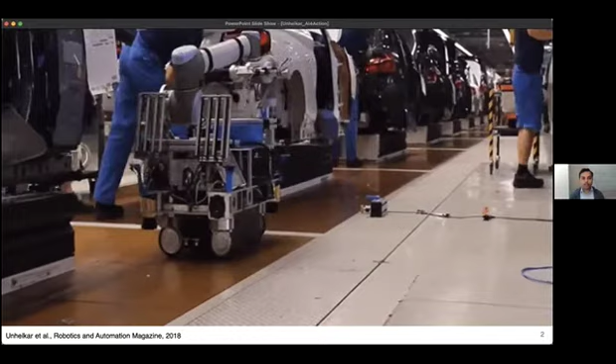Let's look at an example of one such robot. This is a robot that is working in an automotive factory, helping humans who primarily do the assembly of many cars. It's helping them build cars.

And there are a lot of exciting things happening in this video. First of all, there are fancy cars being built. If you go to a factory, you will see that a car is being built every 2 to 3 minutes. This is from a BMW factory, a new car is being shipped out, and there are a lot of humans who are helping assemble this car. It's a very challenging, time-intensive process, and it has to be done precisely in a very short amount of time.

Now, in order to do this task better, and to help humans do it faster, there are a lot of applications of robots that can go and assist humans in making these challenging tasks possible. This is one of such robots that makes this challenging task possible, called Rob at Work.

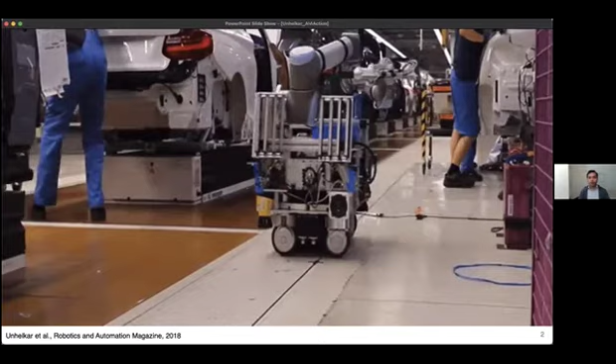What I find really exciting about this robot is, compared to traditional robots, which we'll see soon, this robot can autonomously decide how to help humans, how to work alongside humans using the sensors and software that it has on board.

And that's sort of the challenge we're trying to solve. When I look at these bulky, big robots that can do impressive things, I kind of think about computers that were present in the 60s and 70s. I was not around when these computers were present, but if you talk to someone who has seen them, or see documentaries from the 60s and 70s about the early stages of computers, you would have computers which were so big they would occupy a whole room or maybe even multiple rooms at times.

And these bulky robots, this big industrial robots we saw, even though impressive, are analogous to those early computers. Whereas if you look at computers today, or computers in the 80s, they were small, people could use them and we could program them to do different types of tasks. So robots are also at a very interesting inflection point, where they're moving from industrial settings to settings which are currently industrial, but will soon be in our homes, in our offices.

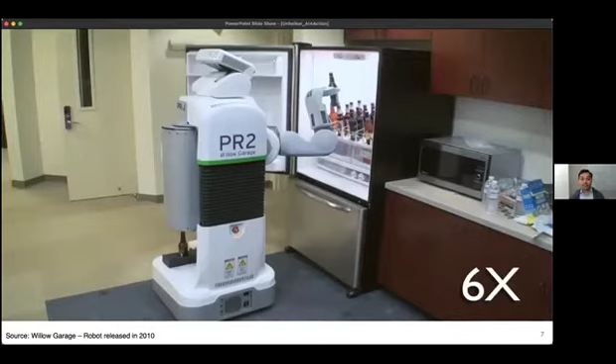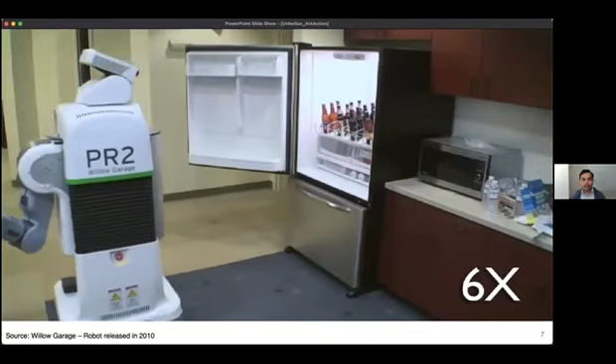So let's look at a very exciting example of such a robot. This is a robot called PR2, made by a company called Willow Garage. This robot is doing a very interesting, very challenging task from a robotic standpoint, while working in a space shared with humans: picking items from a refrigerator, then closing the refrigerator and delivering these objects.

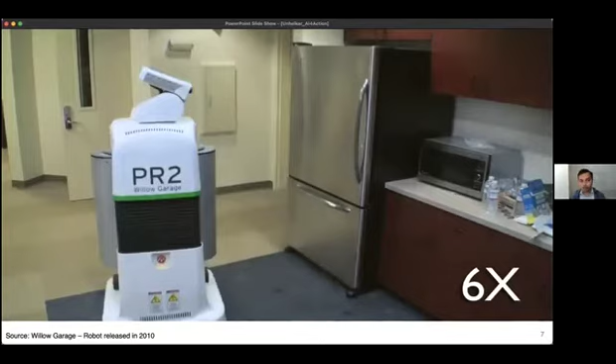All of these tasks are being done by this robot autonomously. It's very impressive that robots are at a stage where they can do all of these tasks by themselves. This sort of example that we saw in the kitchen reflects trends we can see all across the industry.

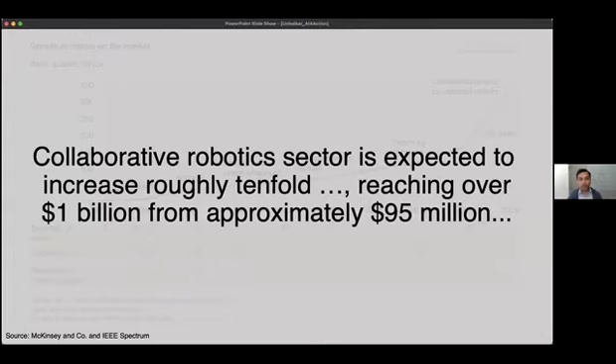Collaborative robots are one of the primary novelties in the robots being sold today, and they're contributing to the exciting growth robots are seeing in the market. The collaborative robotics sector, robots that can work with and alongside humans, is expected to increase roughly tenfold, reaching from around $100 million to $1 billion market within a very short period of a few years.

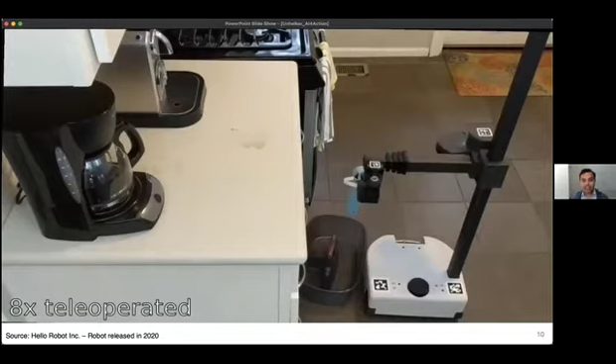So the robot we saw delivering beverages was from about 10 years ago. It's still a very impressive robot, but slightly dated. This is a very recent robot called Stretch, released last year, which does even more impressive tasks. Let's look at what it can do.

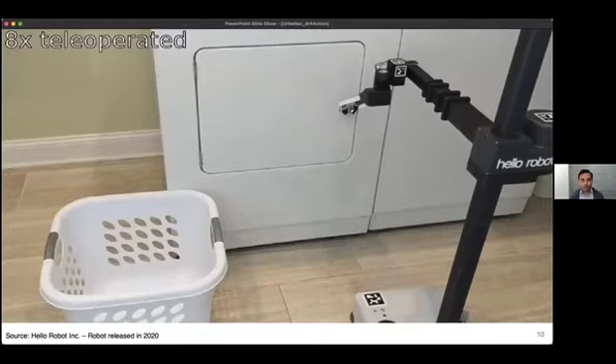So it can do a very impressive set of tasks. And even though it's doing these tasks by teleoperation, meaning a human is behind controlling the robot, it's amazing what robots are capable of doing, even with human intervention, today.

Similar to the history of computers, when we look at the history of robots, we had industrial robots initially, which have been present for the last 20 or 30 years. Now we have robots such as the PR2, which we saw on the first slide, and the Stretch robot, which are really transforming what robots can do and what is possible with robots.

And what's amazing with this progress is they're also becoming very affordable. The PR2 robot, released around 10 years ago, cost close to $500,000, whereas robots from today you can purchase at a fraction of what it used to cost 10 years ago.

This is a really exciting phase, and it gives me hope that I will have robots in my home in the next 10 or so years, able to do some of the interesting tasks we saw in the videos before.

In my education and career, I've been really fortunate to work with some of these robots hands-on, initially in India, then in Boston, and finally at Rice, where I've been able to get a sense of how these robots are programmed and how they reason about the world.

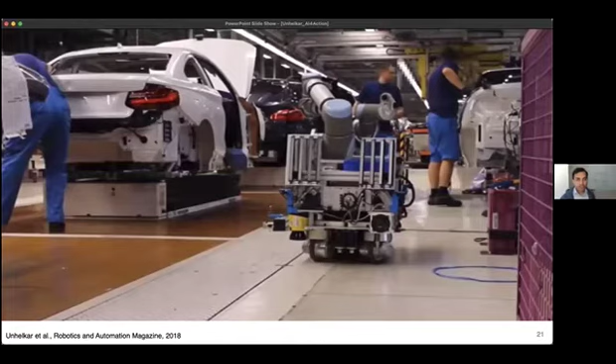In this robot, as we've seen in the example, there are sensors here, if you can see my mouse pointer. This is a laser scanner, which allows the robot to see if there is a human or any obstacle around it. It has cameras, which also help it do that. And then it has this arm and these wheels, so it can move around and make changes to its environment.

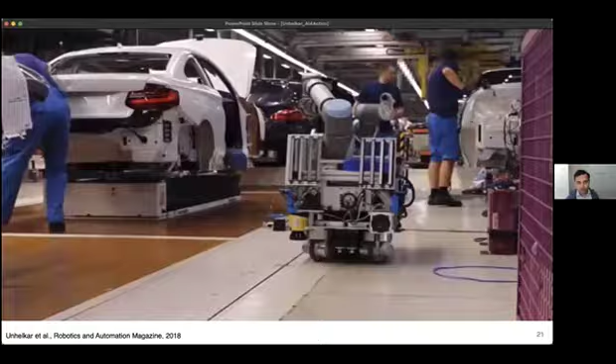All right, now that we've seen what an abstract robot looks like, let's look at how we actually go about programming this robot. Both the robots we saw, all three GIFs we've seen so far, the robot working in the factory, the robot delivering things from the fridge, and the robot being teleoperated, all of them use this exciting piece of software called robot operating system.

This is, I would say, one of the very exciting developments in robotics in the last 10 years, which has made robotics more open source, more easy to program, and easy to prototype. Robot operating system, similar to other open source libraries, is a meta operating system for robots. It's sort of an app store for robots, where you can upload programs or download programs from other researchers and users to be useful for your robots. It has these very exciting features that allow software reuse.

It's very important to stress the utility of this feature. 10 years ago, if you were designing a robot from scratch, you'd have to develop a lot of capabilities yourself, deciding which sensors and actuators to use, and implementing the different algorithms the robot needs. What ROS makes possible is that you can use algorithms that other researchers and users have made in your own robot, which helps you rapidly prototype your system and focus on the elements you want to focus on.

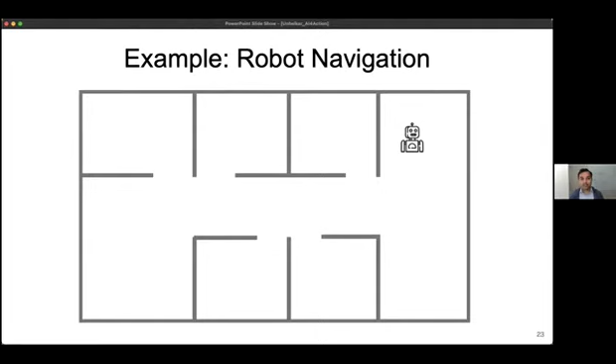First, it needs to know where it is in the map so that it can decide where it goes next. Then once it decides where it is, it needs algorithms to decide what is the best action to take at a particular time. If it's at the bottom, maybe it has to go up, and so on. And if it sees an obstacle, it should be able to navigate around it so it doesn't cause a collision. So it needs really challenging algorithms to make this simple task happen.

ROS allows us to do that by breaking down this problem into multiple pieces. First, let's say to implement this task, we want to use certain sensors, such as cameras. ROS will require us to write a node, or write a program, which takes data from cameras and reads that data on our computer. So it will first be asked to write this node.

Then, if we have additional sensors such as encoders, which tell the robot how much its motor has moved or how much its wheels have moved, we'll write that program as well. Once we have this data from these sensors, which are images and wheel velocity, we can combine this data in a localization algorithm to identify where the robot is at a particular point in time.

Then we can use this robot position with planning algorithms to figure out the robot's path. Finally, we can give this path to a controller algorithm to decide how the robot's wheels should move. And then this will be pushed to the robot so that the robot can actually move in the map.

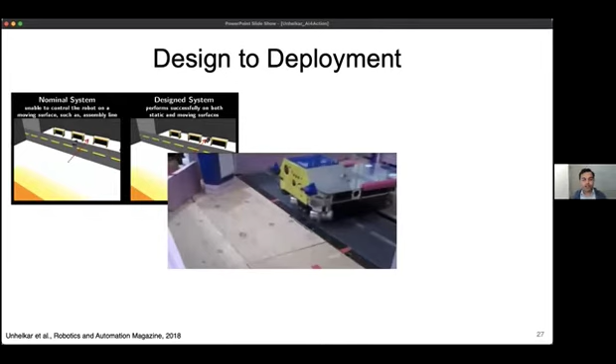Finally, when we were confident the robot worked both in simulation and in the controlled lab setting, only then were we confident enough to move the robot to a real working environment in a factory. Again, in all of these systems, from simulation to the lab to the factory, we were using ROS so we could reproduce and reuse the software from one setting in another. That's the design to deployment life cycle for a robot.

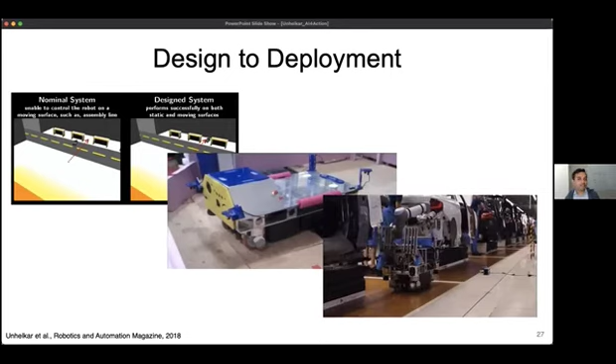So at this point, I'll stop for any questions and see if there are any comments you guys might have.

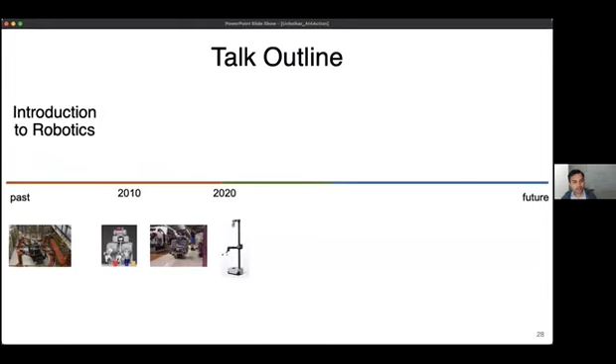I have one question: what exactly is localization again? So localization, thanks for that question. I can't see who asked, but localization is basically a module robots use to localize themselves, to identify where they are in a particular environment. For instance, a localization technique would allow the robot to determine its position given the information from the sensors.

These robots have a sensor called an encoder, which measures how much their motors have moved. For the navigation example, you might have encoders on the robot's wheels, which tell you how much the wheel has moved or what the wheel's velocity is. When implementing this on a physical system, you need software to read the data from the motors and convert it into a variable your localization algorithm or some other algorithm can use. This transformation from sensor data to a usable variable is what's done by these drivers.

Yeah. Okay, I see. Thank you.

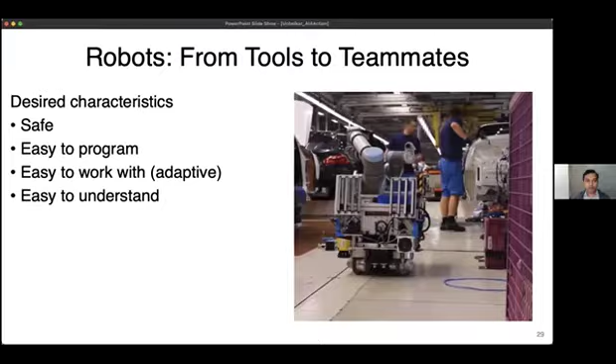And finally, if you're working with a robot and we cannot understand what it is doing, that may not be ideal either. So we want our robot to also be easy to understand. When we design robots that can actually be teammates for us, we need to bake in all of these characteristics. We will see how we can use AI at a very high level to bake in some of these characteristics.

So again, let's take a step back and look at why we need a new set of techniques, a new set of algorithms when thinking about robots that can work with humans. To demonstrate this point, I'll show a blooper video from a very famous robot trying to deliver an object to this human. This robot is very impressive - you might have seen videos of it on YouTube doing backflips and a lot of exciting things. Here it's doing a very simple task from a human standpoint - just handing over an object.

But let's look at what happens when the robot actually tries to do that.

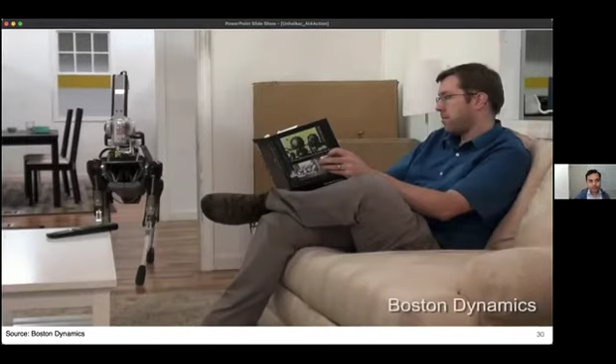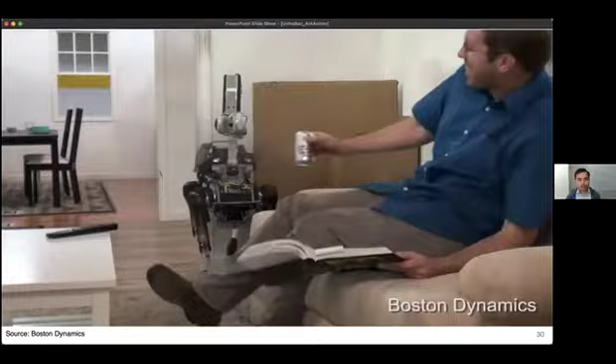So here, as you saw, the robot was able to deliver the object, but it was not very ideal. During the handover, the robot wasn't able to recognize whether the human had picked it up, and eventually it just failed. This was a comical way to demonstrate that it's not as easy to convert robots that work well by themselves into human teammates, because they have to reason about a lot of new challenges when working around humans, particularly about what humans want and how humans are acting in order to complete the task.

When designing robots that can work with humans, we have to fundamentally adapt our perspective from what we had before, where the robot had a high level perspective of having some observations and actions. Now we need to explicitly think about the human that the robot is working with. The robot needs particular AI tools and models to think about the human - what the human might want in a particular situation, what the human is doing, in order to be a good teammate.

And that's essentially what the research that my group does and other human robot collaboration researchers do focuses on, when we are designing robots that can work with humans.

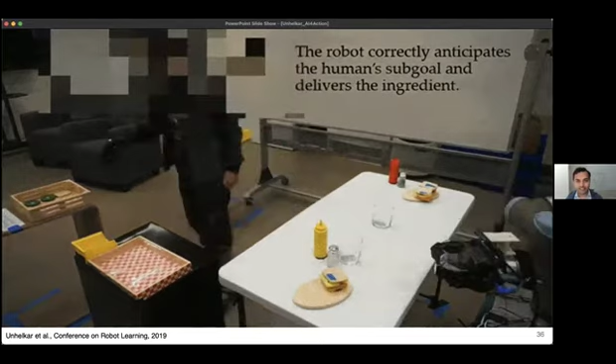The robot had to identify which sandwich the human would make next, where they would make it, and when they would make it, to provide the appropriate ingredient. The robot has to do a lot of challenging algorithmic problems to complete this task.

First, it has to identify where the human is, so it needs certain sensing algorithms. Then it needs to find out where the human would go next, so it needs machine learning to predict what the human will do next. Finally, it needs to use planning or optimization algorithms to go to that location so it can give the human the correct ingredient.

And all of this has to be done very quickly, because if the robot is even a fraction of a second late, the human might move on to the next sandwich or task, and the robot's effort will not be useful anymore.

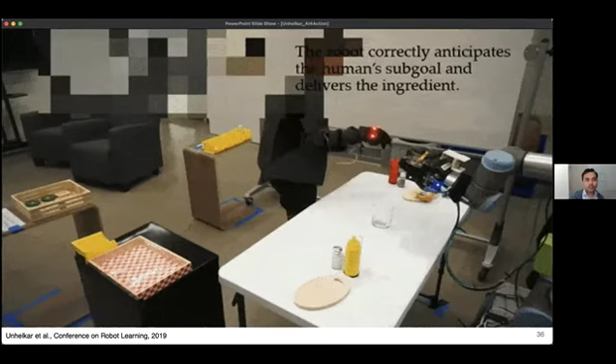So all of this is being done by a combination of the algorithms we saw before. It's using sensing to identify the humans - the human is wearing a particular glove to make the sensing easier in this scenario. The robot has an onboard computer solving the optimization problem to identify where the human is going next and what the robot should do next. Finally, using its hardware, its gripper and motors, the robot delivers those parts.

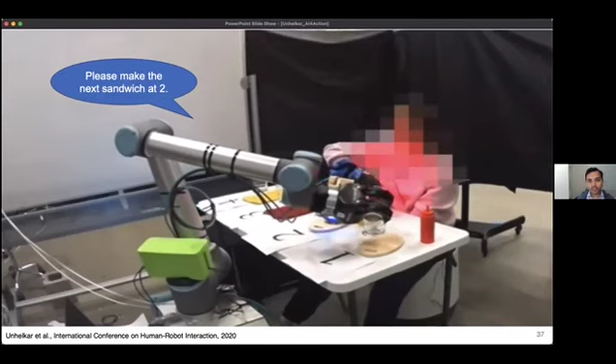When working with humans, we can also use communication as a very important tool to do tasks well with robots. This again uses some of the AI techniques we saw at a high level. The robot communicates with the human while they are doing similar tasks. At times it tells the human what they should do next so it can support them well, and at times it tells the human what the robot is going to do next so the human can adapt while doing the task.

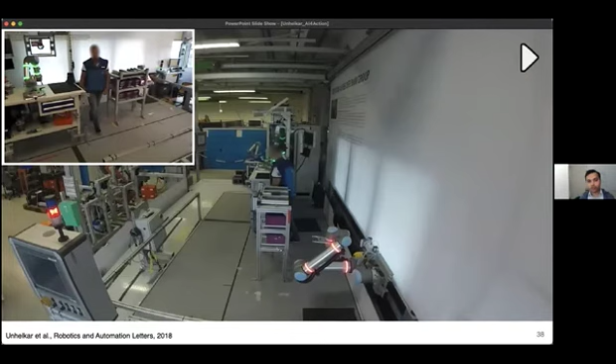And finally, we have used some of the algorithms that we talked about to do tasks in the factory. Here the robot is not helping humans make sandwiches, but helping them with assembling different parts in a factory by delivering appropriate parts or giving them way when they are sharing space with each other. The robot uses its algorithms to identify where the human is, predict what the human is going to do next, and then modify its own behavior so that it can adapt to what the human is doing.

By using the algorithms we have developed, the robot can be not only safe, but can also improve the task performance of the human-robot team. So that was very exciting, that this robot was both safe and was able to help the team do the task faster.

Before we go to the final part of the talk, where we're talking about some of the particular research problems or research questions that are open that we are currently thinking about, I'll stop here to take some questions if you have any.

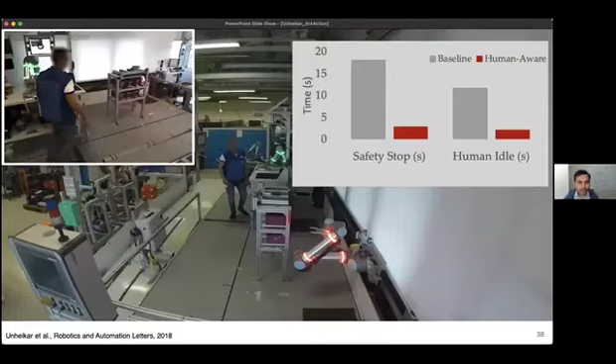Okay, let me go back to the slide. When we do this interim approach, where there is some amount of model specification and some amount of planning, if we go deeper into it, which we did today, the models that the robot is using could be learned with data, and if they need to be learned with data, they need labels to learn from, and this labeling requires some human to provide those labels. If you are extending your robot to do very complicated tasks, to learn these models you might require a large amount of labels, and that's where manual effort is involved.

And why would it be limited to small problems? Because of how many things it would have to, how many labels it would need?

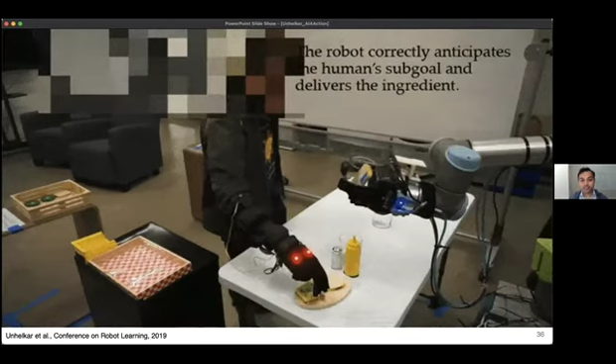Exactly. It is limited to small problems for a couple of reasons currently, and this is something being worked on. First, because of the data needs or the label needs. For very large problems the models might be very complex and you might need prohibitively large amounts of labels. But the other thing that is very challenging for these robots is that when they're planning, essentially what they are doing is deciding between different alternatives and what is the best alternative to take at a given point in time. So in a larger problem you might have many alternatives to think about before making a particular decision. If we go to this video, here the robot has many choices: it can choose which ingredient to deliver, where to deliver that ingredient, and when to deliver that ingredient. All of these choices clubbed together mean the space of decisions that the robot has is very large, even in this simple setting.

To optimize over all of these different choices is very challenging for today's algorithms to do. One way to address this challenging problem is to use reinforcement learning, but then it has its own challenges. So the planning-based approaches, which rely on solving an optimization problem, are limited to, relatively speaking, smaller problems than reinforcement learning.

Okay, I see. Thank you. I have another one. Yeah.

So earlier you mentioned that one of the concerns with robotics is we want to be able to understand what the robot is doing. But as AI gets more advanced, and we already have things like neural nets where it's very difficult to understand what they do, how are we going to be able to comprehend even more advanced AI?

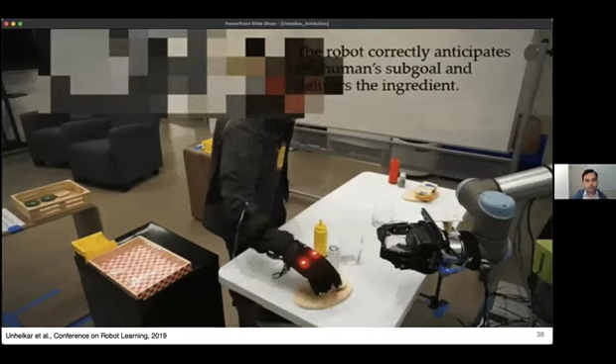That's a great question, and I have a couple of comments on this. First of all, as AI becomes more complex, it is definitely more challenging to explain what it does. I completely agree with you on that.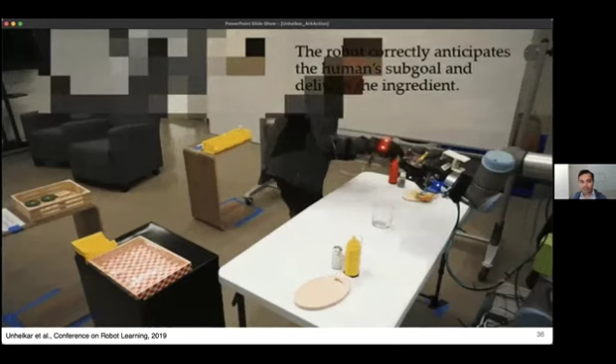But I think it's even more important as AI becomes more complex to explain what it does. Because if you have a complex system and you really don't understand what it's going to do, it feels very irresponsible to deploy it among people without knowing what the system is going to do. It may be unsafe, it might lead to bias, it might lead to all sorts of societal issues from a human standpoint.

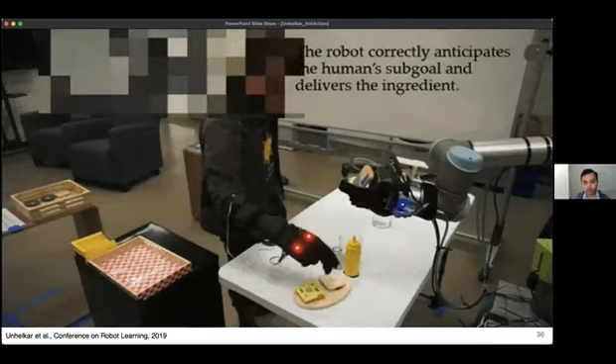So as AI becomes more complex, even though the explanation problem is difficult, it's important to solve. How people are solving it, including students in my group, is we are thinking about using different ideas from how humans learn about other complex systems to explain AI-based systems.

Humans have this amazing capability of generalizing, of making hypotheses by observing something. So here, even if I didn't tell you anything about this robot, and even if I didn't have that caption on top, you would be able to guess briefly what the robot is doing. It may not be completely correct, but you might have multiple guesses of what the robot might do.

By using this capability of humans to guess and make models of what they observe, we can provide them certain examples to explain what they're going to do. So that's one high-level idea people are exploring right now to explain robot behavior. But that's just one among many techniques being explored.

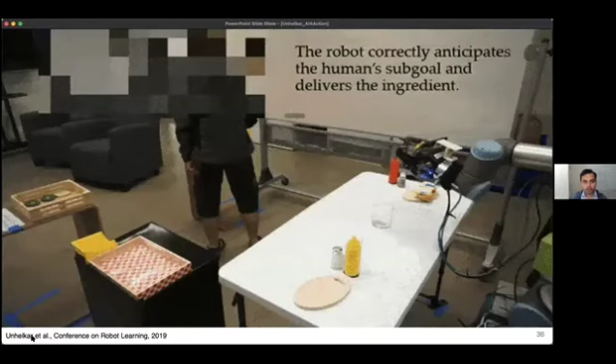Okay, I see. So with generalizing, you get a general sense of what the robot is doing, but if you wanted to know what the robot was doing in specific steps, like at each node of a neural net, how would you understand something like that?

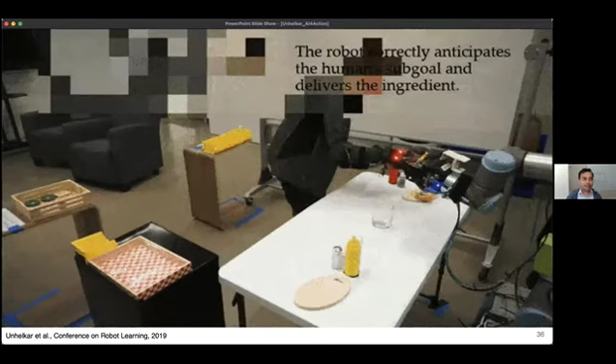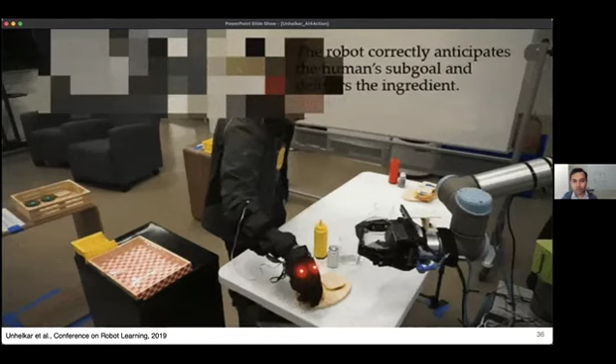Yeah, let's take an example. So you see this robot do something at the start and something at the end. I only show you the start of the GIF and the end of the GIF. Maybe you can interpolate in between to guess what the robot did. Your guess may not be correct, but you can make that guess. And if I show you a few more examples in between, you can improve your interpolation, you can improve your guess.

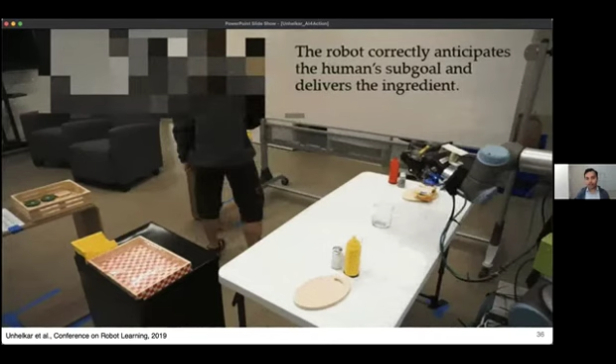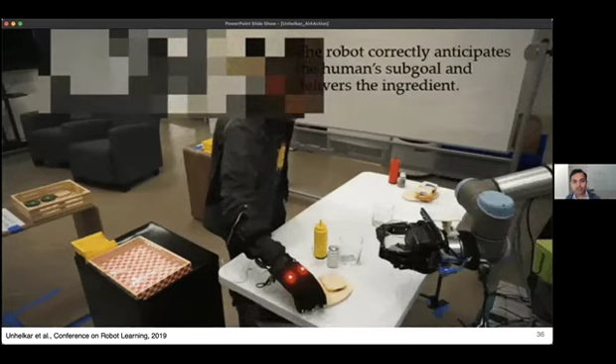So if you're explaining a very complex system to a human, maybe one idea, just one solution approach, is to give them sufficiently informative examples so they can make a good generalization of the system. That's one idea that is used. Okay, I see. Thank you.

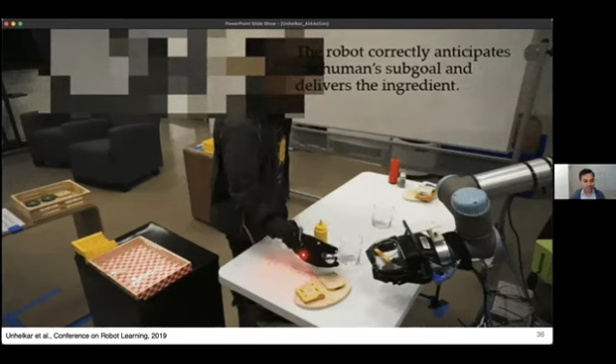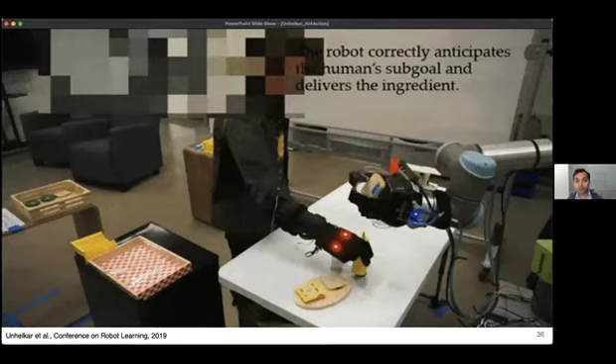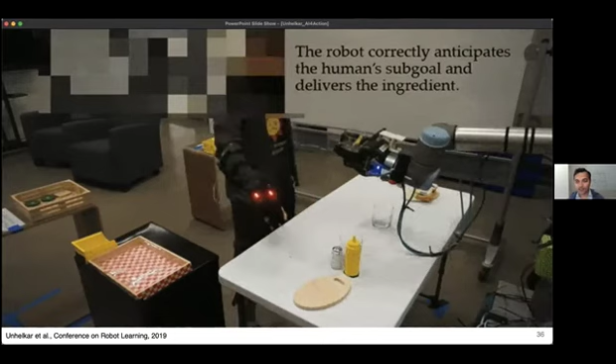But this is again one of those problems which is very challenging to solve, because AI systems, especially robots working with humans, are finally becoming complex enough that explanation is becoming very critical. These problems are also being tackled only in the last few years. So if you ask me this question in a couple of years, maybe there'll be a lot more exciting techniques that I can share with you.

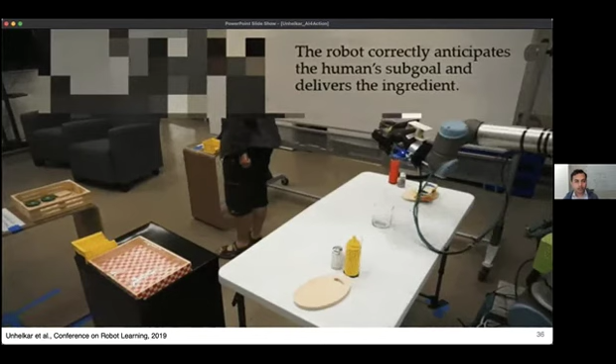Okay. Any other question before we proceed?

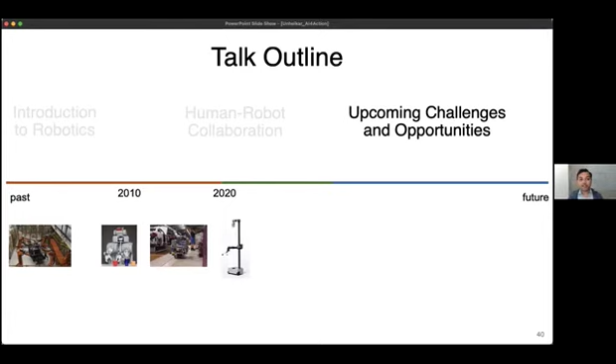Finally, I'll talk about some of the upcoming challenges and opportunities we are thinking about when designing these robots. As we work on these robots, I particularly focus on the AI aspects of designing them. And I assume a lot of you are also interested in the AI aspects of designing robots.

But particularly when designing these complex systems that have to work with humans and do physical actions, there are a lot of subfields that we borrow from. In today's talk, we only looked at AI and a little bit of sensing and actuation hardware at a high level. But if you talk to a researcher working in this area, they would often borrow from a variety of techniques. I list some of them here. So there's definitely AI that we talked about.

Then we need to think about different materials and mechanisms, which might be very important to make the robot either safe physically, or more fast, more repeatable, and more accurate. So there's a lot of work in designing different physical mechanisms and materials for robots.

Then there is a need for embedded systems, computers that can help robots process more data, more computation within a short span of time. This is very challenging for robots, because they have to make these decisions very quickly. As we saw in the videos with humans, the robots had to reason within a fraction of a second what they should do next, so they can adapt to humans and efficiently support them. This is something that will be made possible by more advancements in embedded systems, computers that robots can use to make this computation possible.

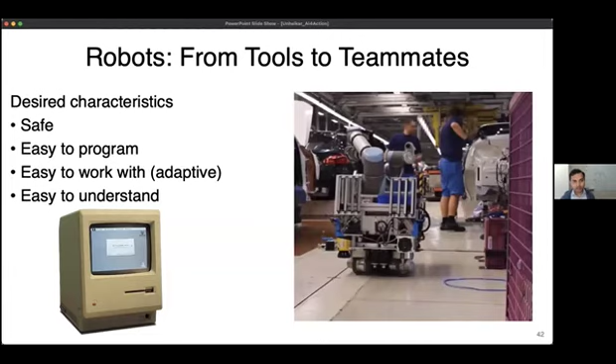In the robotic systems I was showing you before, the robots were not as big as industrial caged robots, but they are still physically very capable. One way to make them safer is to make them compliant. This is a very exciting robot that came out around three or four years ago, which is compliant. What we mean by compliant is if it detects an external force, it will comply to it. So if it collides with a human, it will not hurt the human, but will adapt to the human's impact.

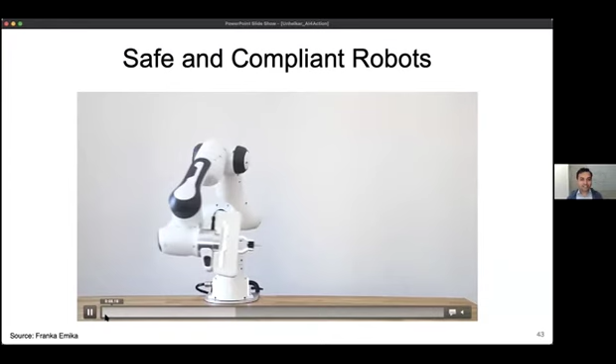Just to show an example of what the robot can do, I'll show this impressive video, made by a company called Franka Emika. As soon as it touches the balloon, as soon as it detects that touch, it realizes it has come into contact with something it shouldn't have, and it stops without bursting the balloon, which is really amazing.

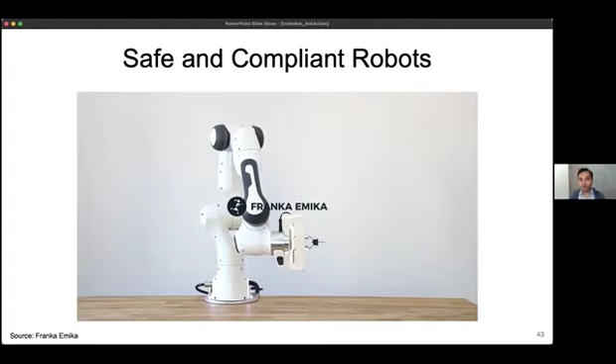This is made possible by better control techniques for these robots, and by sensing force and torque on the robot's arm. The robot uses additional sensors and control techniques to make this possible. This is a very exciting area for robots that work with humans, because if we can ensure the robot is safe by its own software, we'll be more confident in fielding these robots and using techniques like reinforcement learning, which are susceptible to unsafe exploration.

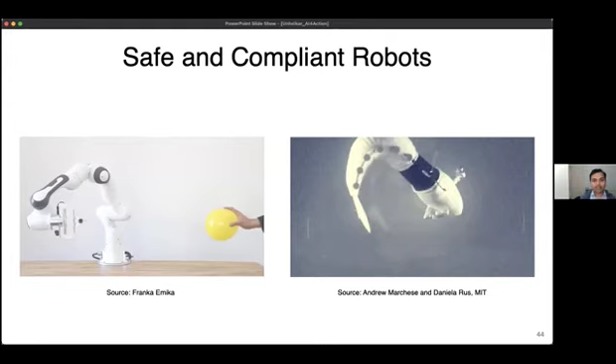Another exciting research area, which is very young but growing a lot, is to think about robots from a very different angle. On the right, we can see an example of a soft robot, which has a very different physical mechanism than a typical robot. This is a soft robot because it's soft, it is safer to work around. This is again a very exciting area of research where people are looking into not only different control and AI techniques to make the robot safer, but also different mechanical design and materials to make the robot safer to work with.

Another very exciting area of research is to make the robots easier to program, to help make them program by demonstration. Here, if you want the robot to do a particular task, instead of programming what the robot should do, if we can show the robot certain examples of how to do that task, and the robot can learn from it, then we can make the robot very easy to program. This is the high-level idea of programming by demonstration, where instead of writing a program, you show an example to the robot.

This is again a very active area of research, where we are looking into how you can give these demonstrations, give examples, and create algorithms which can learn from these examples to teach the robot a particular task.

One example might be if you want to teach the robot to pick up something from the shelf. One option is to write a program. The other option is to show the robot a particular example, and then the robot does that task.

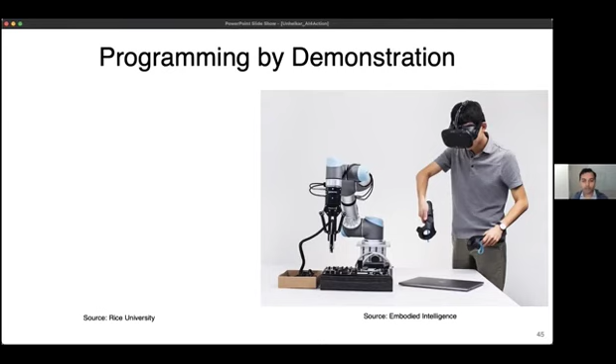There's a lot of interesting work in industry as well, where novel ways of providing these examples have been looked at. Different sensors and different user interfaces are being explored to show the robot how to do a task.

And finally, as these robots work with humans and alongside us, it's very important to think about the ethical aspects, the safety aspects, and how they might influence the humans around them.

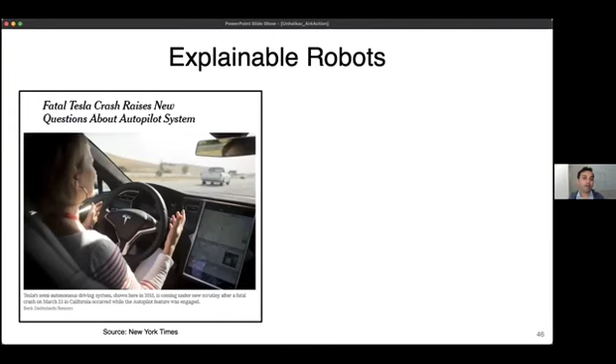First of all, very importantly, we want these robots and systems to be safe. One way to do that is to make them explain what they are doing, so a human can examine whether they are safe, and also make sure they are not biased or limited to a particular set of users. This is a very important question to solve, something researchers have just started working on. Making robots easy to understand is a very important piece of the puzzle to solving these problems.

So with that, we have looked at two different generations of robots: one from an industrial setting, analogous to computers that occupied a whole room, to a generation of robots that can work with and around humans, similar to computers in the 80s. But just as computers have progressed to become much more advanced and much smaller, robots also have a very long way to go. I think robots today are at a stage where computers were in the 80s, with a lot of exciting research topics and problems to be solved.

And these are just some of the problems that I can imagine. I'm really excited to see what happens in this area, and what some of you would go on to do in research in AI and robotics would make possible. So really looking forward to that, and any questions that you might have. So, thank you.

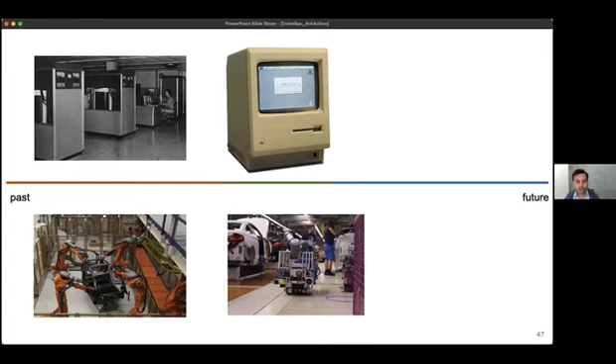So with bias in AI, is that primarily determined by the sets of data that you give it?

Bias in AI comes from a couple of reasons. One is the data itself is biased. For example, if I train the robot in my lab but then test it in a factory, the data set in the factory may be different from the data set in the lab, and that's why there might be a bias. Another reason might be that the robot's objective or policy itself is incorrect or exhibits some type of bias. Understanding where bias comes from, and what different types of biases there are, is a very active area of research, but these are a couple of examples of where bias might come from.

Okay, thank you. Any other questions or comments? Otherwise, I'll hand it over to Ivy.

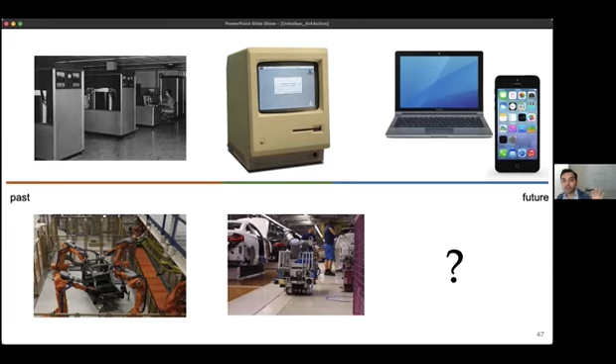So does the robot need to be programmed case by case? Yes, that's so in one of the example settings that we saw initially. Let me go back to that.

In this setting, if you're handcrafting a policy, handcrafting what the robot needs to do, you program what the robot needs to do for each case. But by using planning or reinforcement learning, you can avoid this requirement. You can use learning or planning algorithms to make sure that you don't need to do this.